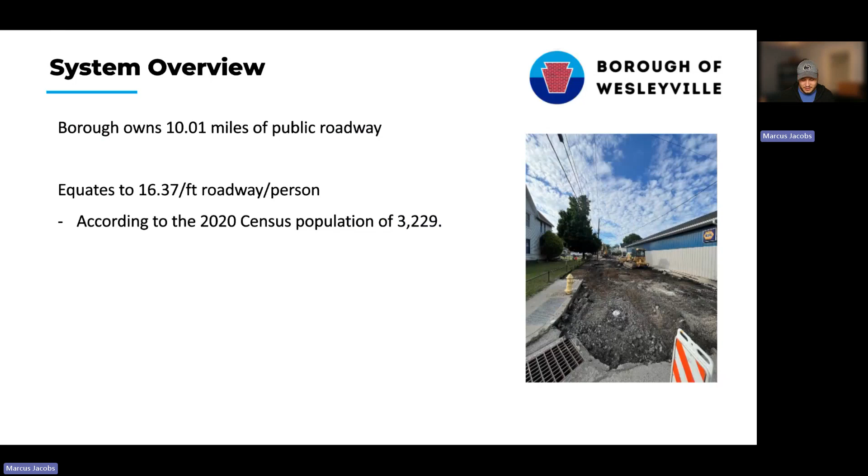So first off, what does it typically look like for a road? What is a typical cycle? For asphalt roadways, PennDOT recommends a 12 to 15 year resurface cycle - every 12 to 15 years, getting it resurfaced, trying to budget for that.

We probably can't do that, so we should aim for more like a 20-year cycle. It's just more affordable, it's more attainable, and it's probably good enough for us given the amount of traffic that we have. I think we can extend our roadways to be 20 years, and it also just makes the math a little bit easier. And it's challenging even to get to a 20-year cycle, as you can see.

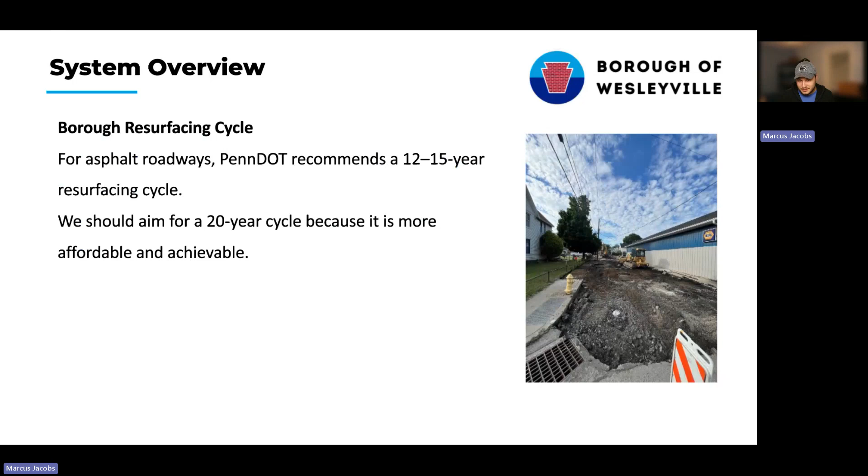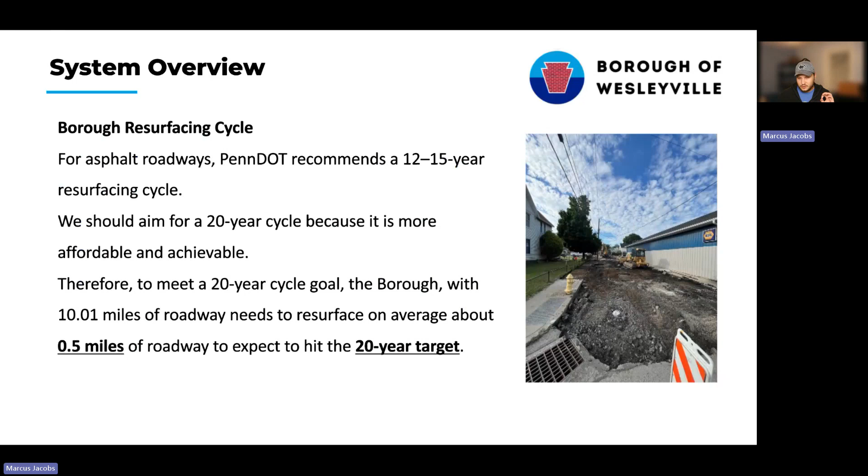So in particular, if we have a 20-year cycle goal in place, the borough with a little over 10 miles of roadway needs to resurface on average about 0.5 miles of roadway every single year to expect to hit that 20-year target. Yet you also need to make your roads last 20 years as well, so it's a challenge all the way around. But 0.5 miles of roadway every year being resurfaced is the goal - if we can get that, then we're on track.

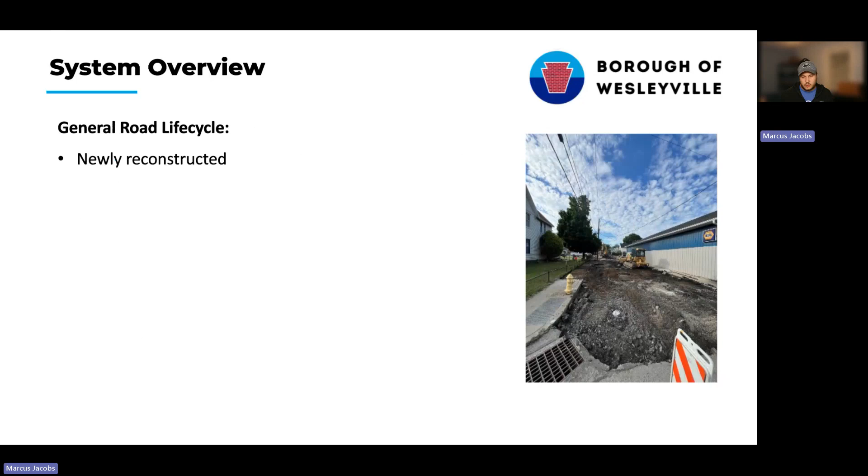In terms of what a general road life cycle looks like, PennDOT has their recommendations - 12, 15, but we'll do 20. For one, it's newly reconstructed, so you've got a good solid roadway with a solid foundation. Then after 5 to 7 years after that road has been laid down, that's when you can start to think about some pavement preservation techniques with different treatments that you would apply, probably every 5 to 7 years after that, and just get into that cycle.

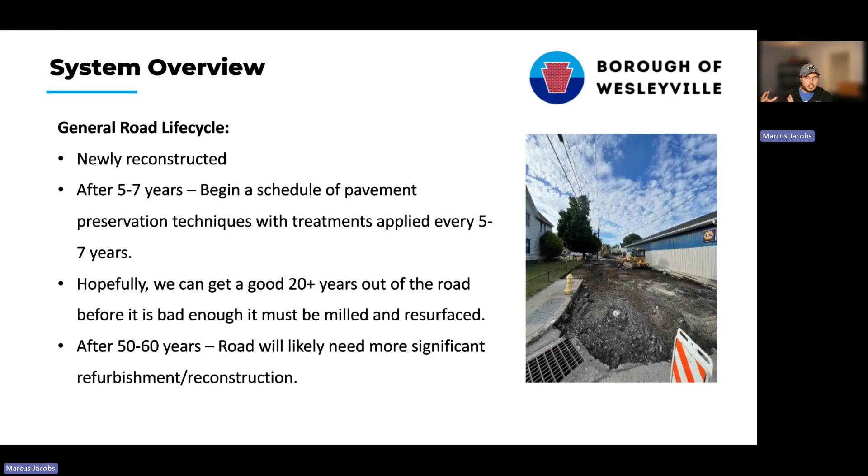Hopefully we can get a good 20 plus years out of a road before it is bad enough that it must be milled and resurfaced - that's really the goal here. After a couple of cycles, if we get 20 years thereabouts with resurfacing repeated 20 years, 20 years, 20 years, then after about 50 to 60 years of that kind of cycle, the road will likely need some sort of more significant refurbishment or reconstruction. So there'll be one kind of big project every 50 to 60 years or so. That's the general life cycle.

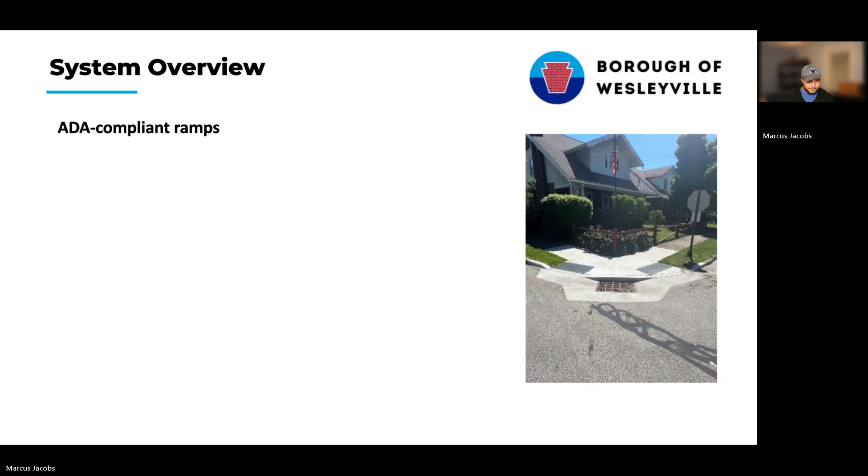We are committed to improving all aspects of our transportation system to ensure that it meets the standards of the ADA guidelines. What's nice about these is that once you put them in, there's relatively very little maintenance on them, and you're going to get 50, 60 years out of them. So it's actually a really nice investment.

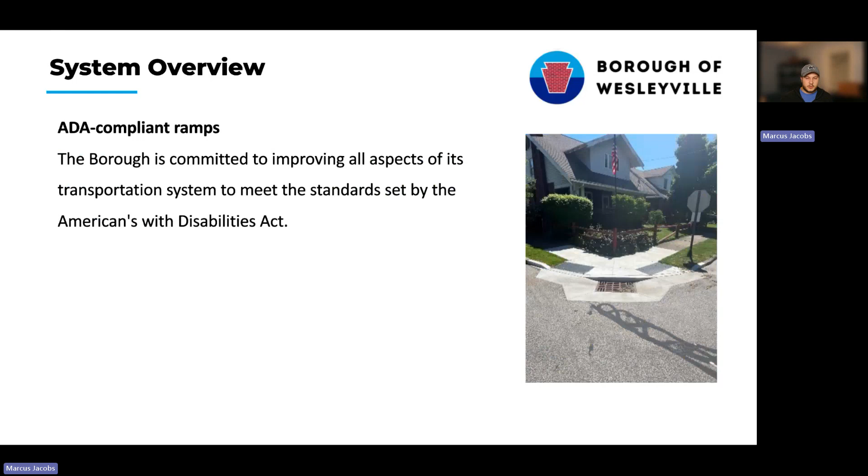And you see a lot of impact. It really looks a lot better, it functions so much better, and it's so much more accessible. So we really need to be thinking about this. Every time a roadway is impacted, meaning when it's resurfaced or reconstructed, the borough includes these investments in the project scope.

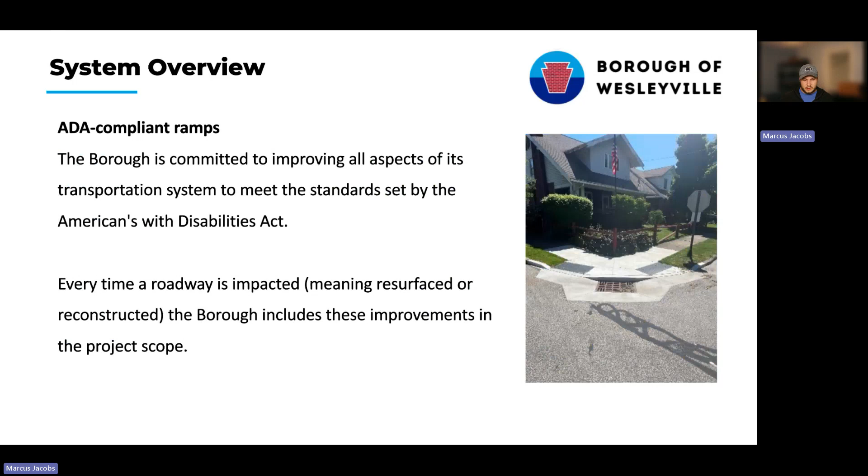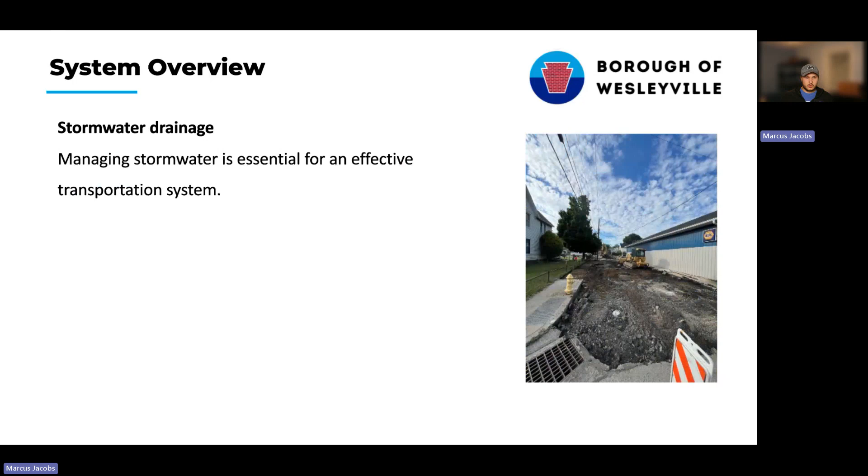Next is stormwater drainage, another thing you need to think about when talking about roads. Managing stormwater is essential for an effective system, and we have an aging stormwater system in place with many components that are falling apart. We have catch basins, which are an important piece of the puzzle, that are just crumbling—old masonry, pretty much 100 years old. We need to make investments in this system to improve it, and it's best completed at the same time as the roads. That's another thing you have to do along with the road, so it really increases the costs.

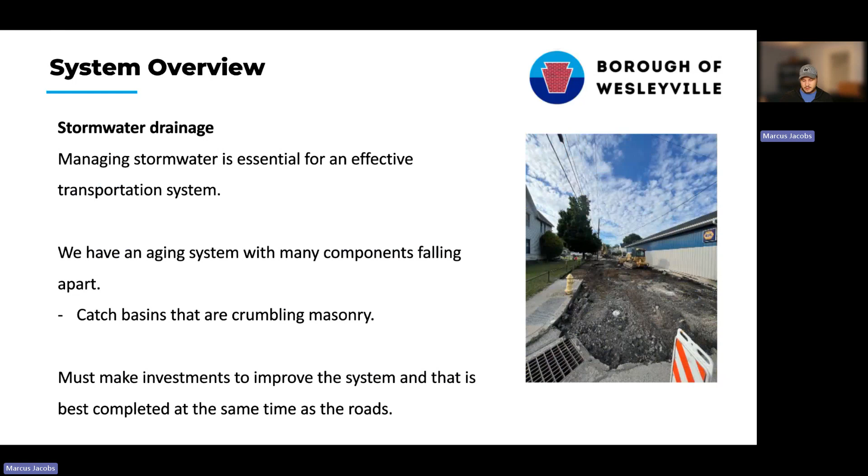And then road signage, something we have a responsibility to do. We have public roadways, and public roadways need signage. We are on the hook to post signage, including stop signs, speed limit signs, street name signs, one ways, parking, crosswalk signs, and more. Currently the signage we have is old and no longer functional to the degree it needs to be. This is often forgotten about when we're budgeting, and the cost quickly stacks up.

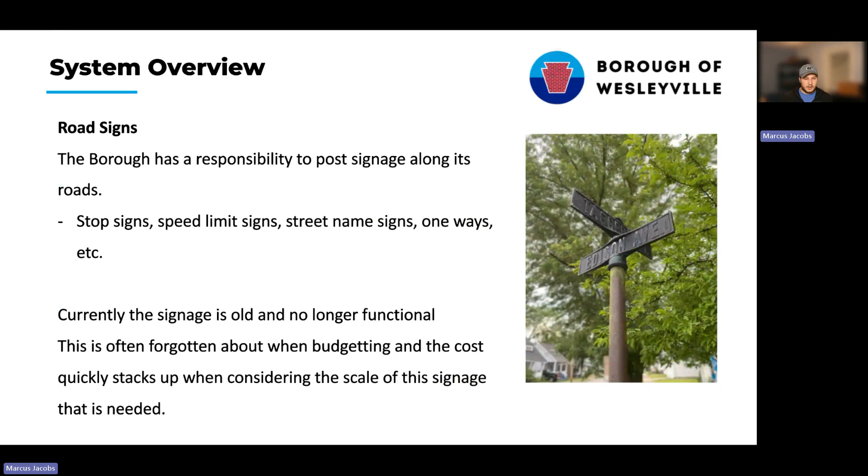You don't just need one or two stop signs, you're going to need 20—and 20 of everything, and the cost immediately skyrockets. So this is often forgotten about, but we need to put a good chunk of investment into this. The current signage is old, dilapidated, and non-reflective. That's really the big piece—you can't just have flat signage anymore. You're supposed to have it be reflective, so it's better with headlights at night.

The signage we have off to the side, the old-fashioned way, is amazing, traditional, very nice aesthetic for the community. However, all of those need to be repainted so they're clear, and really they shouldn't be the primary sign anymore. We should put up the reflective ones so we're up to date with the latest standards. Reflectivity is good, and they need to be a little larger in some degrees—the other ones just have better fonts and all that. There's been a lot of thought that's gone into it over the last 100 years.

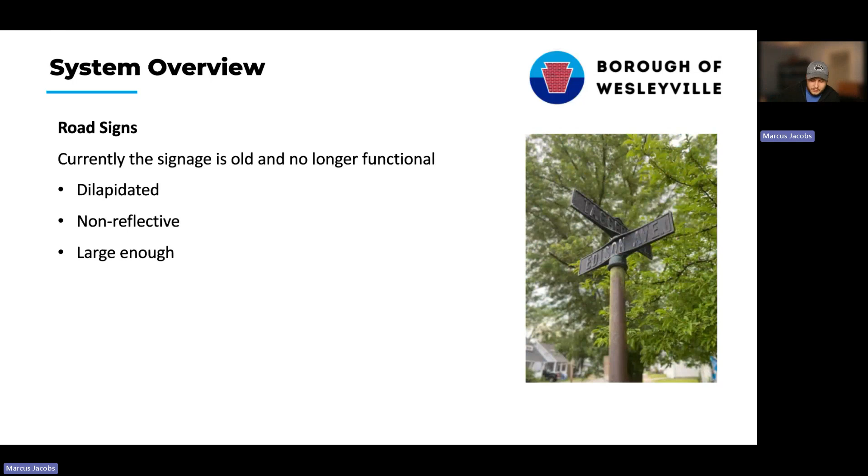But these are amazing, and any ones that have had to be taken down—if people in the community have ideas of how to use this, we've been thinking about how to repurpose those old metal signs, like this cast iron one in the picture here. How can we reuse them as a public arts display or something like that? Or should we put them back up at the intersections alongside the new ones? We'll have to think about that, but let us know. We must plan to improve this, and this is often overlooked.

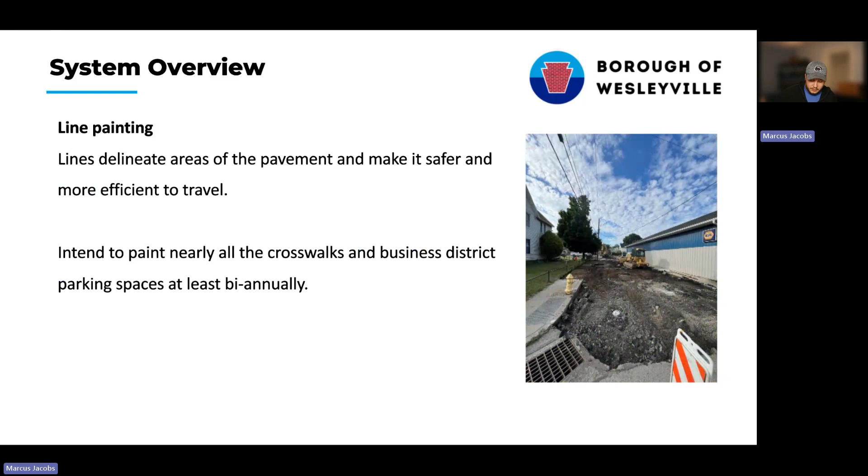Line painting is another thing to consider. Lines delineate areas of the pavement and make it safer and more efficient to travel. We intend to paint all the crosswalks in the business district and the parking spaces at least biannually. This is something we do mostly in-house, completely in-house really, and it can be challenging to undertake for our relatively small public works crew. But they really knock out quite a bit. When you think about it, there's a lot of lines to be painted, so it's definitely a large undertaking.

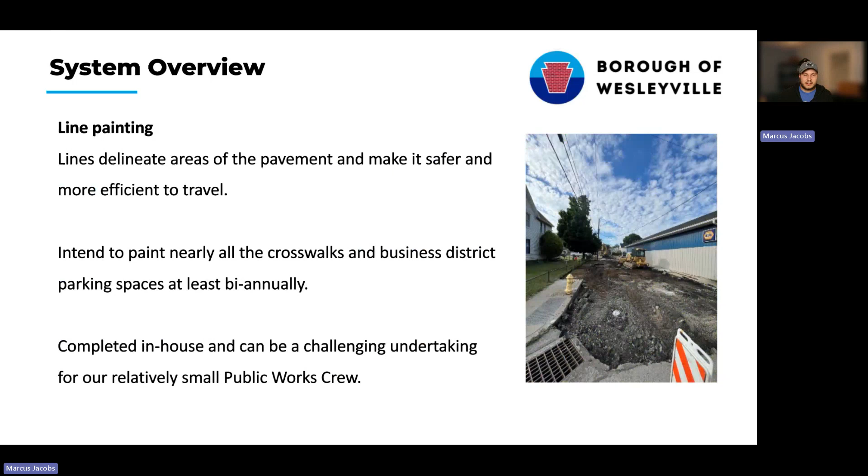And then it's worth noting that as we've gone over the system here, there's a lot to think about. It's very expensive, but transportation infrastructure is a challenge for everybody—it's not just us that's experiencing these challenges.

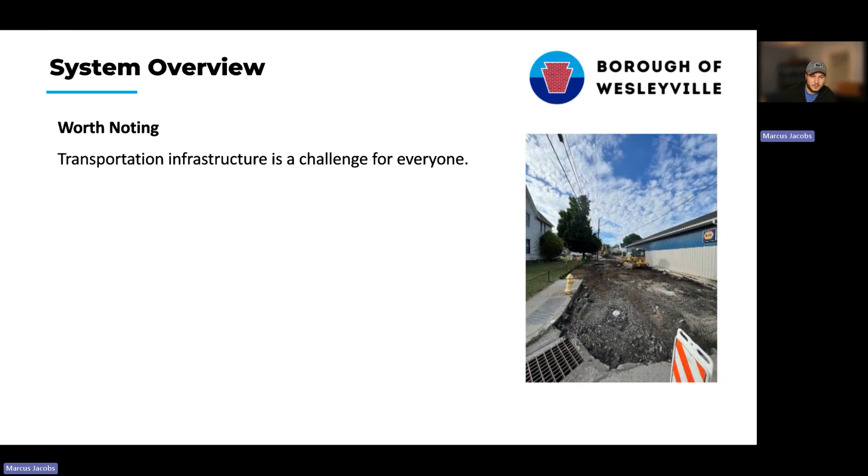There's actually only two PennDOT approved firms in this region capable of working on resurfacing public roads, and that's one of them we're very proud of hosting right here in the borough, having a headquarters right here, McCormick Construction. They are right in our backyard.

Contractors come from all around to the asphalt plant that we have right here in the borough, off of Pearl Avenue. So when we're undertaking a transportation infrastructure improvement program, a lot of that centers around needing to upgrade our roads and asphalt pavement. It's certainly helpful when we've got an asphalt plant in our backyard, or we're in their backyard, and it's super easy for McCormick Construction to get work done in and around this area. We're on their doorstep, so we're very lucky for that.

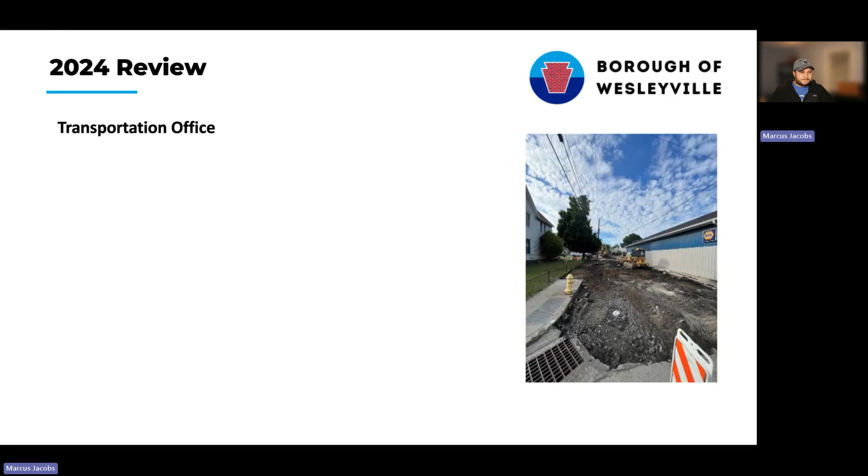Now to look at what we've done this year, we've had a pretty busy year in 2024. Overall, we reconstructed - did a full road reconstruction, dug it completely out. That's the picture you see here on the right, the really dramatic construction photo. Completely dug up the road, had to relay the foundation, and then build the roadway up a total of 12 inches of pavement, a very significant amount of asphalt. That was 2 blocks of Center Street, and that cost $300,000.

That would not have been possible without the help of the county executive contributing $250,000 of gap funds. So we hugely appreciate that. It wouldn't have been possible.

Next, we did a good deal of resurfacing - Eastern, Willow, Gray, and Idlewood - for over half a mile, a total of 0.65 miles. So we are exceeding our target right now of 20 years. And that did set us back a pretty penny, $209,000, $210,000.

And then in terms of preservation, we're still moving forward. We tried for the first time in 2023 seal coating, and we did it again this year, or as a lot of people might know it, tar and chipping. We did this year 1.05 miles so far, and that was $45,000.

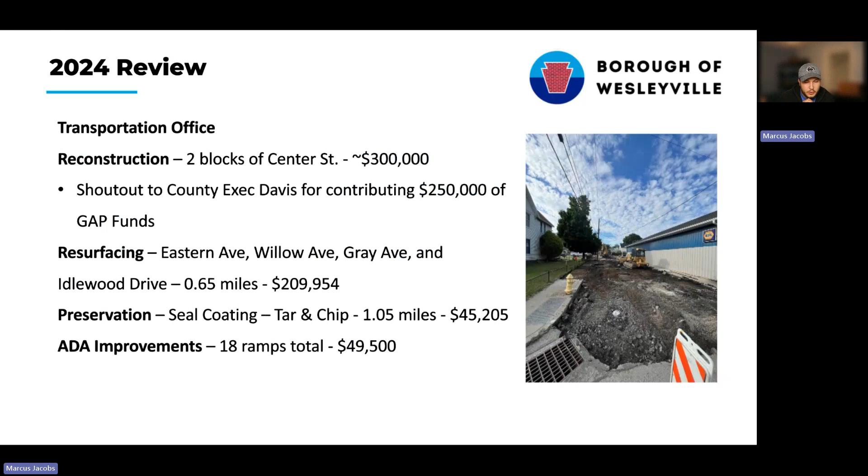And then we also did significant ADA improvements to our borough here, with a total of 18 ramps completed. Well, 18 ramps actually on their own, and then there were some more that were looped into the resurfacing projects. But overall, we spent $49,500 dedicated to ADA improvements.

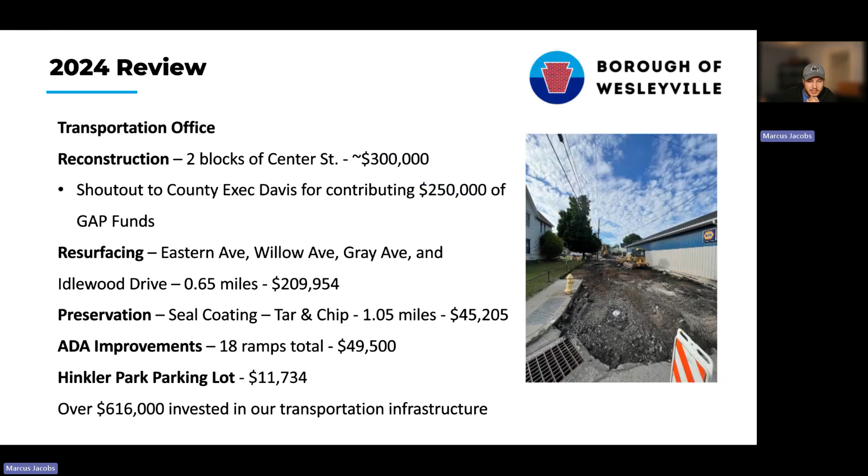And then also we put a parking lot in Hinkler Park - at least that was the millings that we laid down and got rolled out and everything. So that's a huge improvement for the park down there. And in total, we invested $616,000 into our transportation infrastructure. So it's been a significant year this year.

Now, one thing to address is our concrete streets. We got a fair deal of them. We own quite a few streets that either have a concrete surface or have a concrete base that has been overlaid with asphalt. In terms of the overlay, you can often notice that by the reflective cracks that peer through the asphalt. The concrete has cracks in it, it has joints, and those joints you can't just cover with asphalt - they will shine through or reflect through the asphalt over time. So you really have to deal with it. A concrete base with an overlaid asphalt is not a very effective road, so we've got to do something about our concrete surfaces and our concrete base.

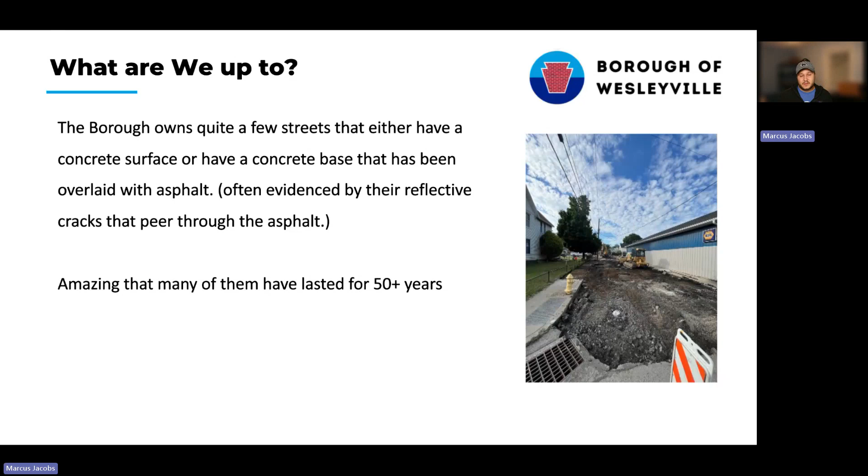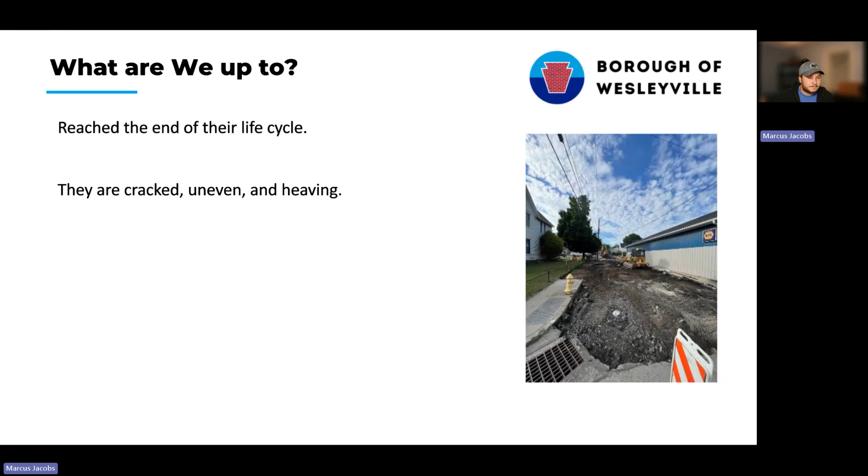Now it is amazing for many of them how long they have lasted, over 50 years for the most part. But by this point they have reached the end of their life cycle - that's just the reality of it. They are cracked, they are uneven, they don't have the best foundation, so for the most part a lot of them are heaving back and forth. They're relatively difficult to repair, and the repair options are limited.

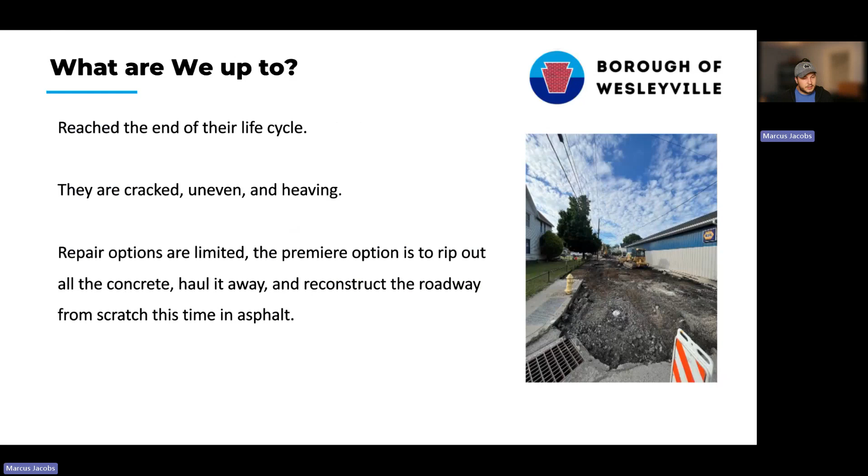Really the premier option that we have is to rip out all the concrete, haul it away, and reconstruct the roadway from scratch, this time with asphalt. As I said, we got the asphalt plant right there, so we might as well rip this out and lay down some asphalt. But it is going to cost quite a bit - it is not easy to rip up and haul away that much concrete, and laying down that much asphalt, just the pure quantity you have to put down, it's just expensive.

If we are fully reconstructing a roadway, we really need to be completing other projects in tandem. So if we're doing the roadway, we might as well do the sewer line underneath, or it also needs to be done with stormwater drainage improvements, curbing in certain areas, or ADA ramps. All these things, when we're doing a project, you kind of have to look at as well.

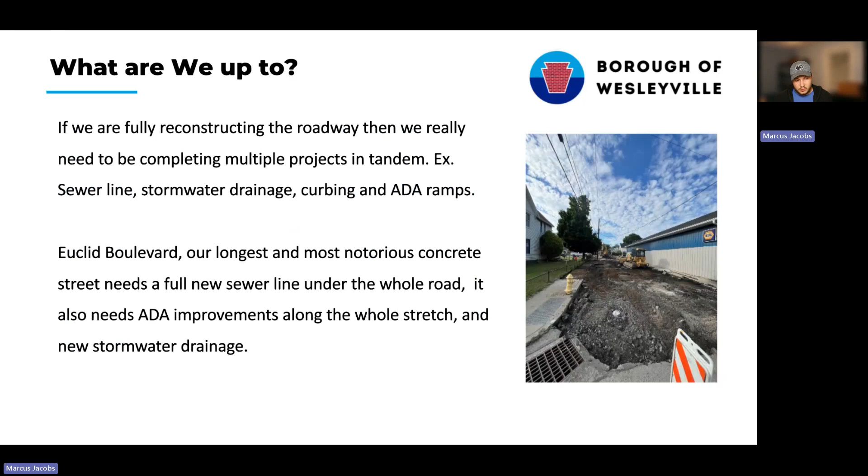Euclid Boulevard, as many of you know, is one of our longest and most notorious concrete streets, and it needs a full sewer line under the whole road. It also needs ADA improvements along the whole stretch, and it needs stormwater drainage. It's a long and wide concrete road, so imagine the massive amount of concrete that needs to be moved and hauled away, and then the massive amount of asphalt that needs to be laid down to recreate that road. On top of that, the sewer line underneath, the ADA improvements, the curbs, the stormwater - there's so much to think about there.

The estimated project cost for Euclid is $2 million, and every single year that goes up a little bit more. $2 million is something the borough cannot do itself, doesn't matter how much we save. We would have to save for a decade before we'd be able to reach that target - maybe a decade to 15 years - or we'd have to go significantly in debt. And if we did save for a decade, we couldn't do anything else; everything else would crumble just so we can do this one road. It's just so out of the ballpark, these numbers.

So we definitely need to figure something out here. There are grants that can do this, but it's not super easy to get grants. You have to put together a good plan and detail it. If someone has experience with that, certainly step forward - we could use the help.

But anyway, that's just an example - $2 million, that's a big one. We have a fair deal of concrete streets, and each of them... this is one of the biggest and longest, so it's going to be the most expensive likely. But there's a good deal of other ones, and it all adds up.

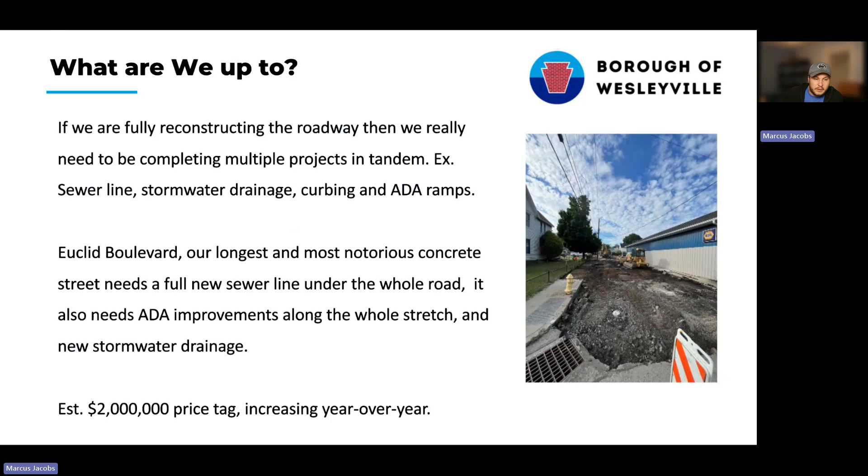Now, in terms of pavement preservation techniques - in general, because pavement is so expensive to replace and repair, we need to make sure we preserve it as best as we can when it's in good condition.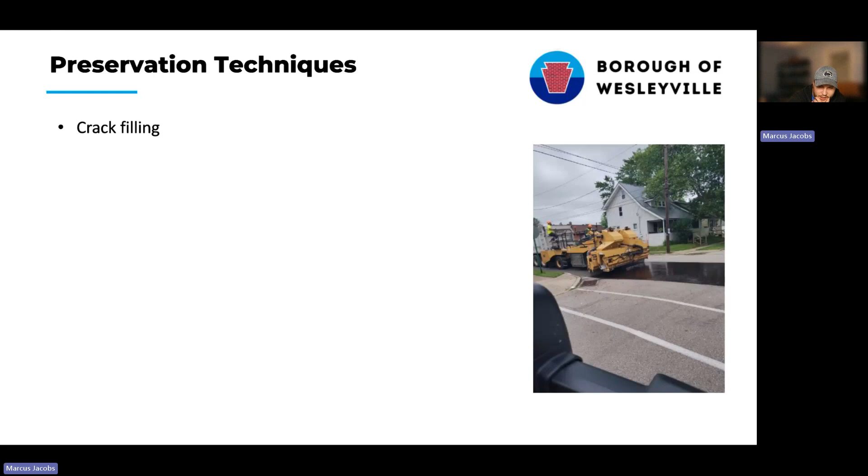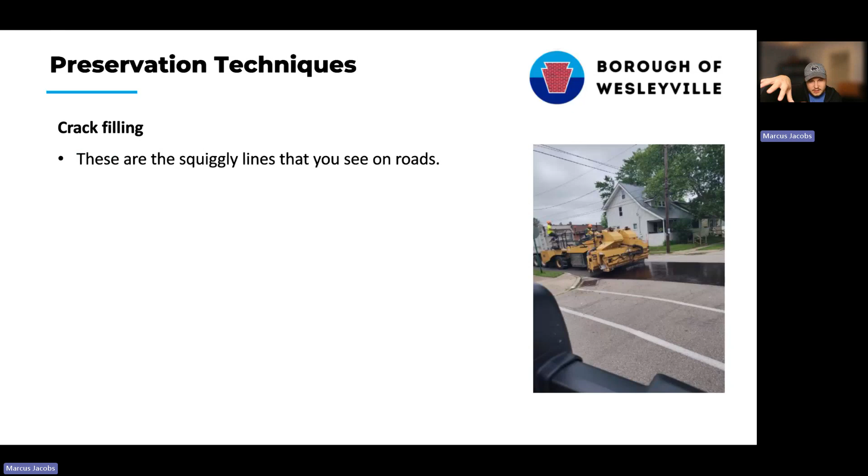For one thing, crack filling is an example. I realize now I shouldn't have put this picture here because that's not crack filling. Crack filling is those squiggly lines you see on the roads - those black tar lines that go all over the place. They're kind of ugly, but they serve an important role: applying a line of oil to a crack fills it in, and that prevents water from seeping deeper into the crack, which would then freeze and weaken the pavement even further.

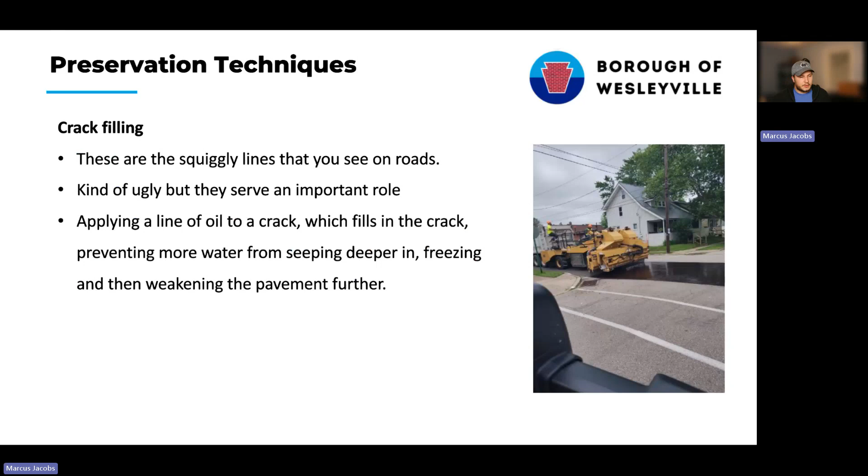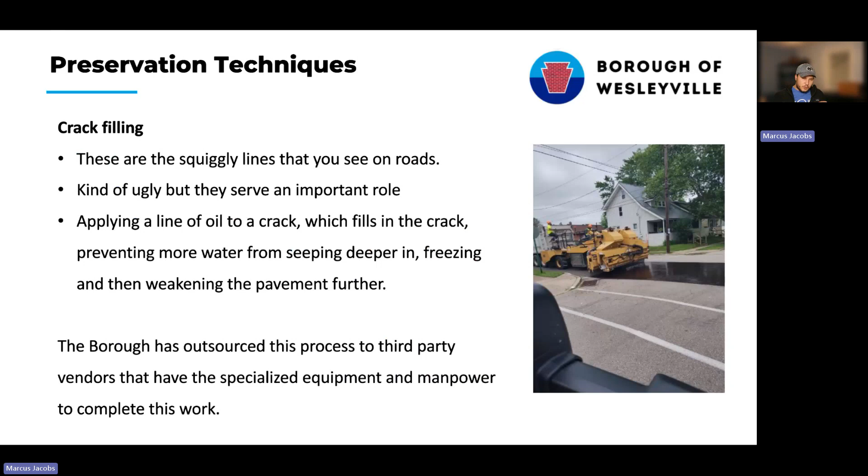The borough has outsourced this process to a third-party vendor that has the specialized equipment and manpower to complete this work. Realistically, you'd need a specialized piece of equipment and to buy the materials yourself, so it's cheaper if we do it on a per-gallon basis for crack filling. We try to do this as much as we can - you get a decent return on your investment, especially for those thicker cracks. Filling this in is really important.

Next up is pothole filling, completed in-house by our public works crew. The potholes in the road surface are swept out, and cold patch asphalt is put in the hole, which helps prevent more water from getting in and the pothole from growing even larger or continuing to crumble around. Pothole patching is a quick fix which buys us time until the next resurfacing - hopefully we can fill in these potholes, keep the road surface comfortable, prevent it from growing any further, and buy us time until we're ready to do a more significant resurfacing.

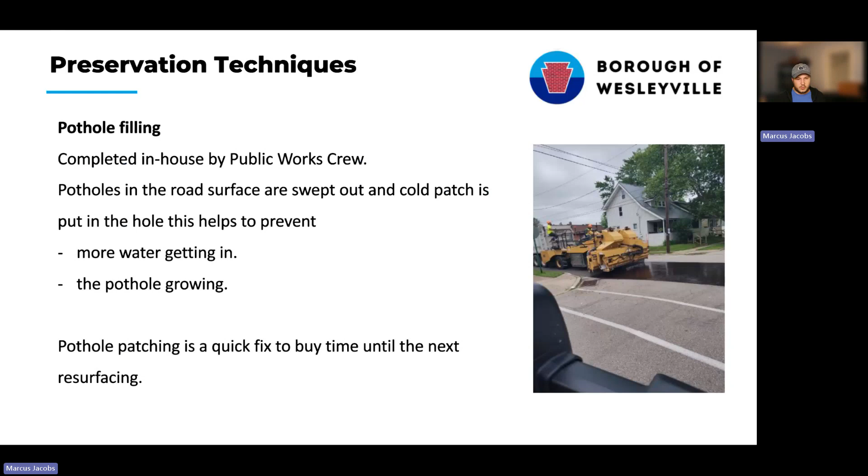Now, if significant potholes are forming somewhere - sometimes you'll see a whole section that's just got significant potholes - that might be a sign of a larger problem, such as some underlying foundation that needs more significant base repair. It's a sign of a bigger problem, and it's not easily fixed with just simple pothole filling. So you might see and be annoyed by the rough ride over a certain section, but there's only so much you can do to fill potholes with cold patch.

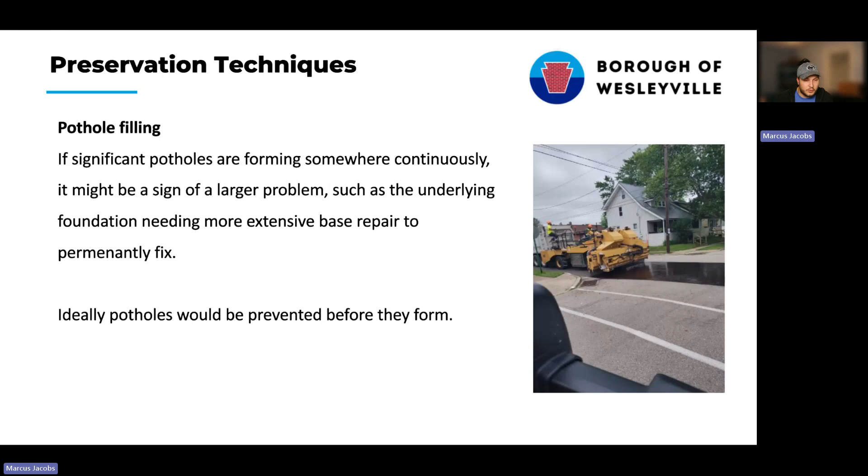Some of it, when you have a problem in the foundation underneath, it's going to be what it's going to be in that section, unfortunately, until you can do the more extensive repair. Now ideally, with potholes, they would be prevented before they form. So one way that could be done, to seal the surface before a pothole forms, is seal coating.

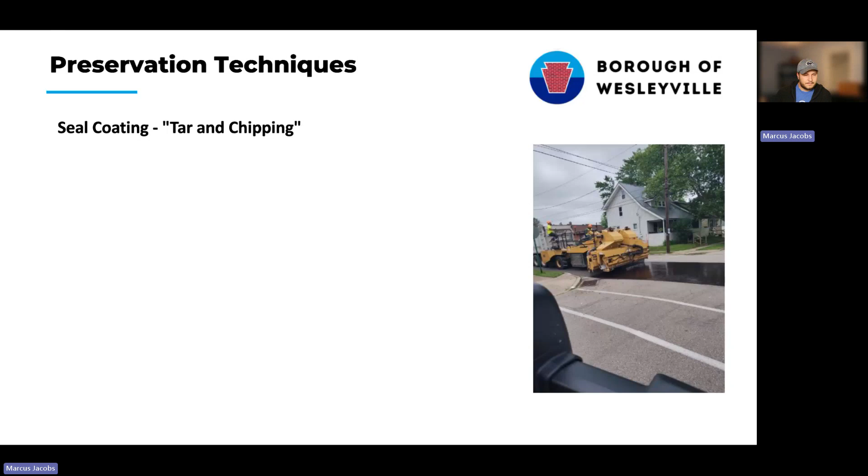The way seal coating works, or more commonly known as tar and chipping - you've likely heard it called that - this process begins with spraying an oil-based mix on the existing asphalt surface, which saturates the surface and seeps into the cracks, sealing it uniformly.

So that's what we're seeing over here on the right. That machine is spraying what we'd refer to as tar or oil onto the surface. As that hits the surface, it saturates and seals it, separating the air from the surface as it was before. Then immediately after, this machine - it may be hard to see here - follows up with a layer of aggregate rock, or as we may know them, chips, which will then set into the oil and create a new roadway surface that protects the oil layer.

That makes sure that sealant, which is very tacky, stays down, and the chips will then kind of settle into the surface.

Then after about a month, once the surface has been driven on and settled in, the borough uses a street sweeper to collect the excess rocks. We try not to use the street sweeper when it's too dry, because it gets very dusty in that circumstance.

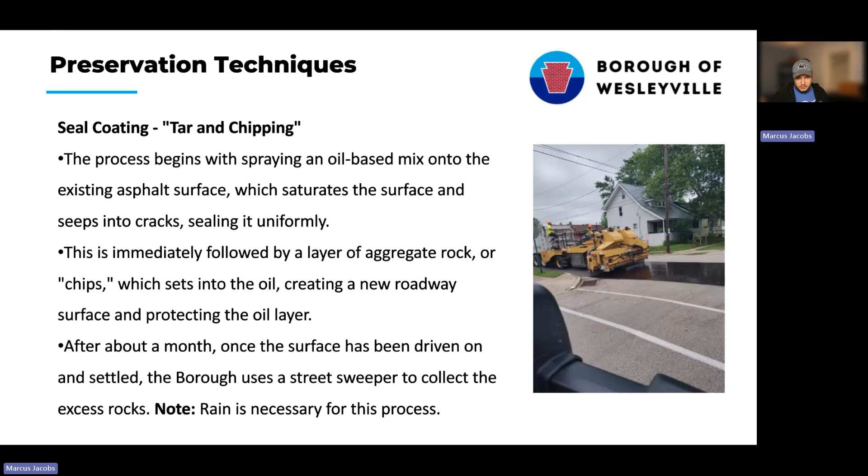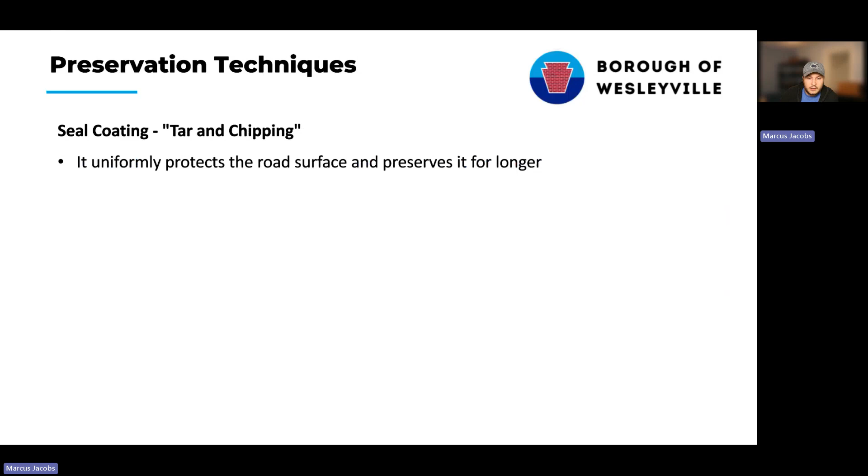Also, the great thing about seal coating is that it uniformly protects the road surface and preserves it for longer. That means the good asphalt roads we do have will last longer before crumbling, and more costly repairs can therefore be delayed, and the finite resources we have can be focused on other priority areas.

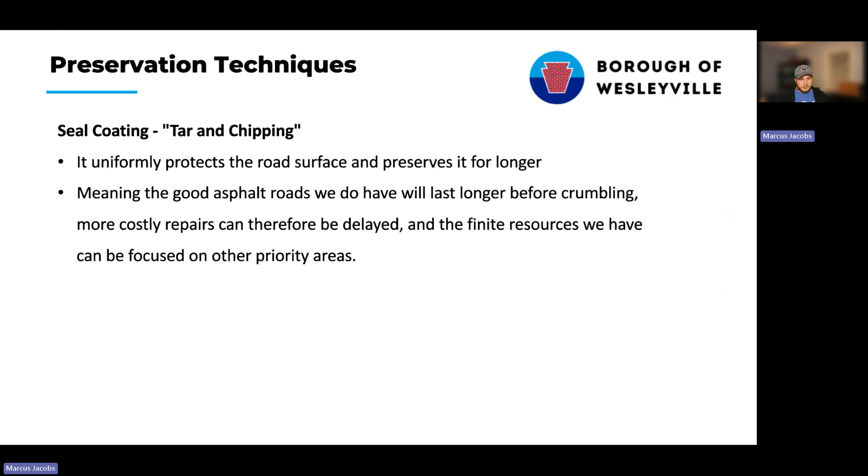Seal coating is relatively inexpensive - about 8 to 10 times cheaper than a resurfacing, and a resurfacing would be like a mill and repave. So it's about 8 to 10 times cheaper than that, and a multitude cheaper than a reconstruction like we saw on Center Street. So much, much cheaper.

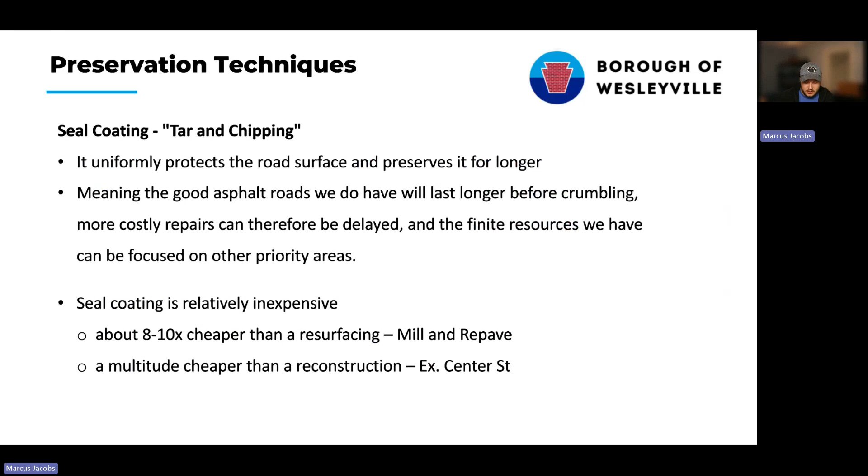We are also part of a joint bid packet that includes nearly 20 other municipalities. This joint effort increases our quantities, so we're buying in bulk, which provides us with relatively good prices. It also shows we're not alone in this - there are 20 other municipalities in this region also tar and chipping their roads, because they also see the value in this. So we really ought to be doing it.

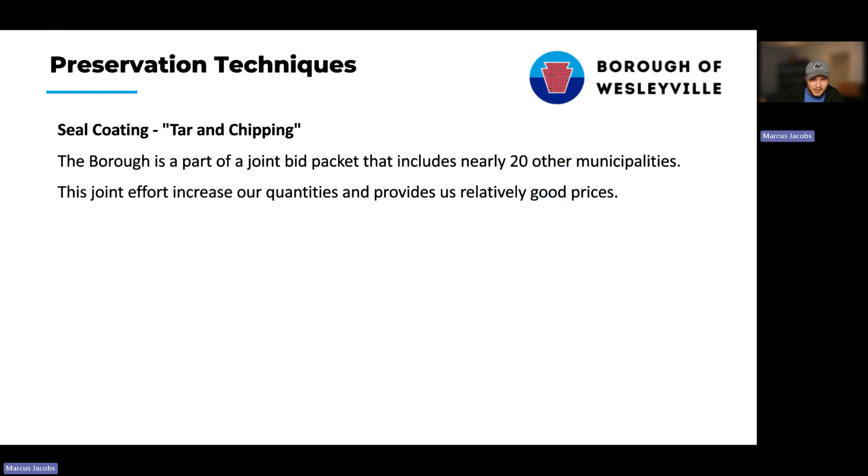In the 2023 season, which was the first time we really did this, we did a total of a little over 2 miles, and we did College Heights, from 27th Street to 32nd, and that was interesting - a lot of people, since it was the very first time it had been done, were kind of confused. Then again we did it this year in 2024, and that was just over 1 mile so far, on a couple roads: Union, Woodlawn, and Willow.

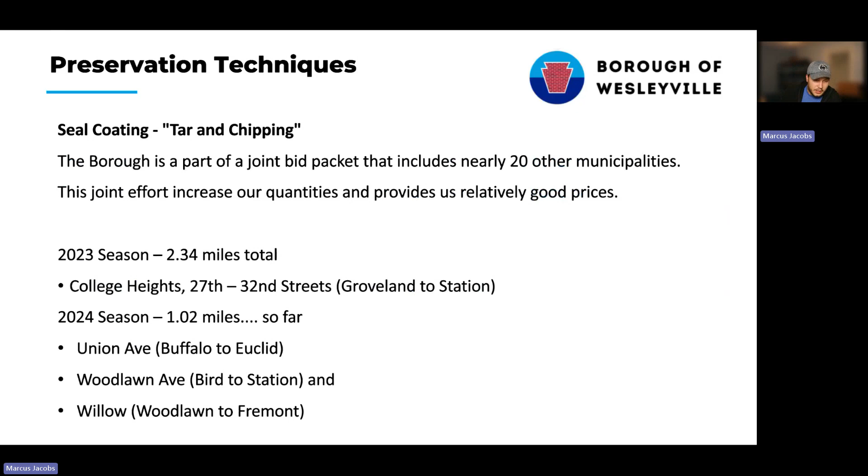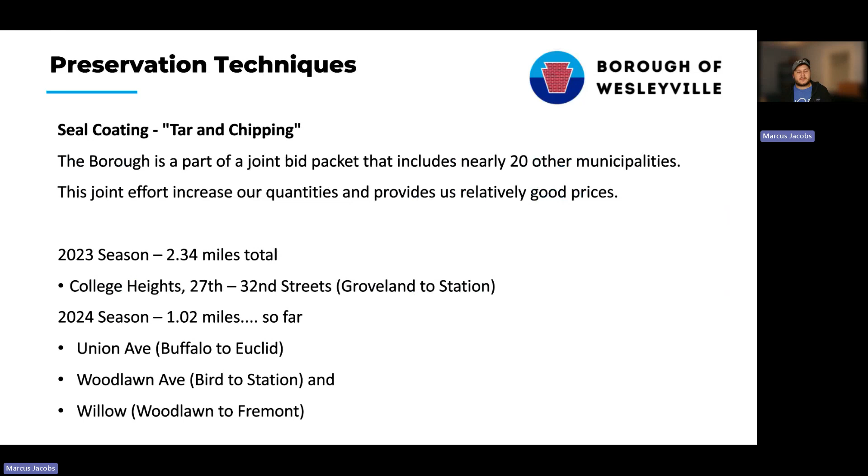Again people were confused, and it was the first time we've seen that, especially in town, where you see sidewalks and more stormwater drains and stuff like that. So it was something different we're trying, and it only works in certain circumstances.

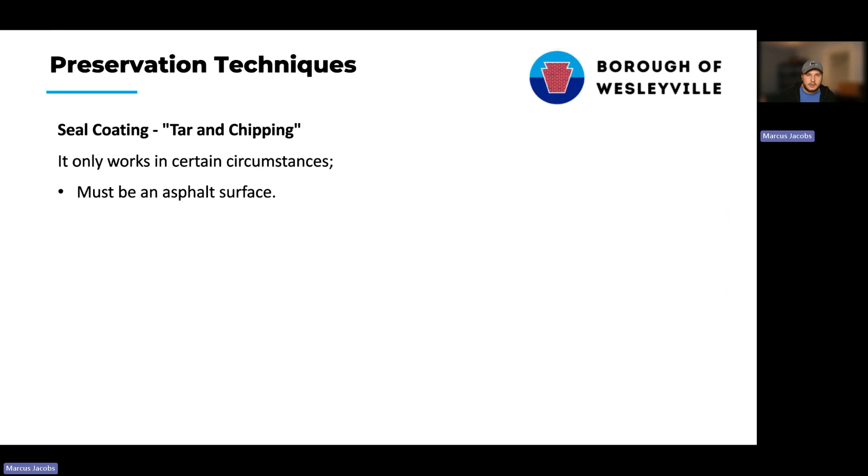If we see the value in seal coating and want to try it on some of our roads, what are the requirements to be able to seal coat? For one, it must be an asphalt surface, so immediately all the concrete roads we have are excluded from this entirely. It doesn't do anything - if you spray it onto concrete, it doesn't fix the underlying problem with the concrete at all.

It also must be relatively flat on the surface. You don't really want too much bumpiness, or tire track divots or things like that. Seal coating is really just spraying the surface and putting a little bit of chips on it. You're not fixing much, you're just preserving the surface that's there.

And it must not be too new. You don't want to preserve a surface that's in very good shape already. So you're like, well, I can live with not preserving this for a couple years, and I can preserve other roads that are higher priority right now, maybe.

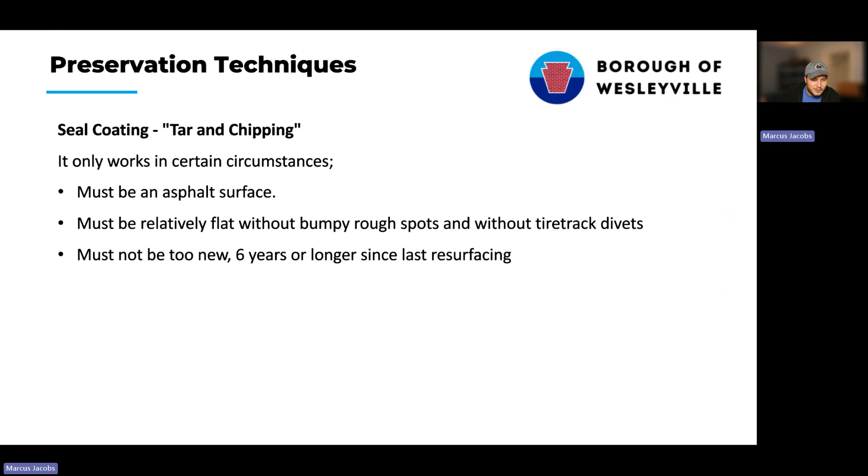And you also must not do it if it's beyond saving. If it's so bad, it's so not flat, it's everywhere messed up and bumpy, then you're not going to fix the road by seal coating it. Especially if you anticipate resurfacing it within the next 5 years, you'll be spraying seal coat on this and then ripping it up.

So it doesn't make much sense. Spend money better, don't spend it on roads that are too bad. That is sometimes counterproductive, because people will see us doing work on roads and say, 'Wait, why are you doing a road that was in relatively good shape when we have a road over here that's in bad shape?' And that's completely reasonable. But in this case, we're really saying, well, that road is in such bad shape, we give you that, the road is so bad that this doesn't make sense to do on it anymore, and we're just going to have to budget for this over the coming couple years for some roadway.

If it's so bad, it just needs to be resurfaced. We just have to budget for that in the next couple years. There's other roads that are in better shape that we can seal coat and preserve them for longer. So as I said, seal coating does not repair, it preserves. It's not some silver bullet, it's not something you can spray on a bad road and suddenly it's a good road. It's just to preserve.

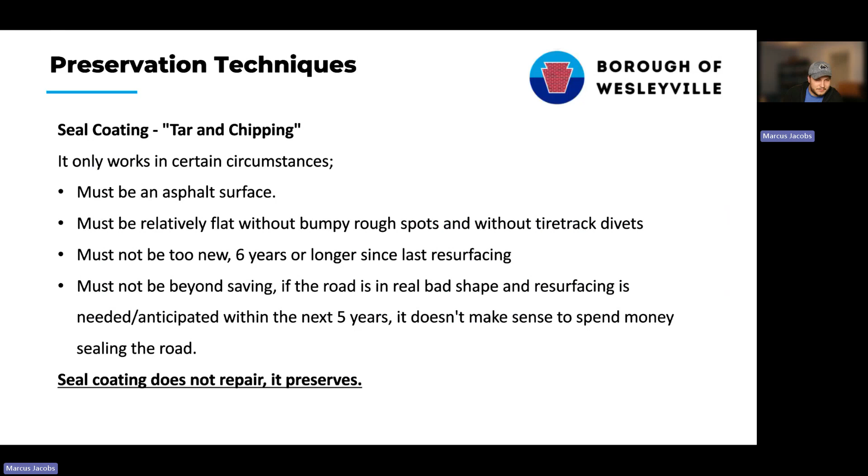Now there are cons after 2 years of having done this, and the public's reaction to it. These are generally what we've experienced, what we've seen.

It's new to the borough. It's not something people are used to, so it definitely took people off guard. Hey, what is going on here? It's also something that's maybe traditionally perceived or more often seen in a rural community. So a lot of people were kind of like, 'Whoa, what? We live in town here, so why are we getting this preservation treatment that you see out in the rural areas, in the backcountry roads, where dirt roads are sometimes seal coated.'

And just to clarify that, there are a lot of municipalities that over time have taken dirt roads or gravel roads and seal coated them, kind of done that as a way of cheaply getting something that resembles an asphalt road. Realistically, that just shows the versatility of seal coating. But in our case, obviously we're doing it differently. We're not doing mud and putting seal coat on top of it. We're taking an asphalt surface and putting seal coat on top. So it's a different angle that we're coming out at it, but we're using a similar technique.

So yeah, rural communities certainly do tar and chipping, but we certainly have our own reasons why we'd be interested in doing it as well. And it's not like we couldn't. It still works here.

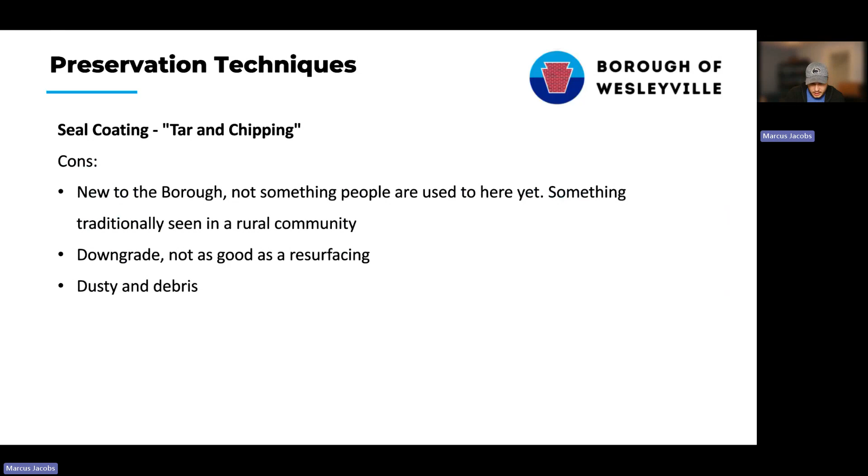In that short term period, when you have a lot of that chip material that has yet to settle, you're going to get a rough riding surface, so it's rougher than you would have on a nice, smooth, blacktop asphalt. People might perceive it as a negative thing.

There's also frustration as to why certain roads are chosen rather than other roads. Some people would say, hey, why do you seal coat this road when this road over here is so bad and needed more investment, needed prioritized? So there's confusion as to what this process is and the value of this process in the whole system.

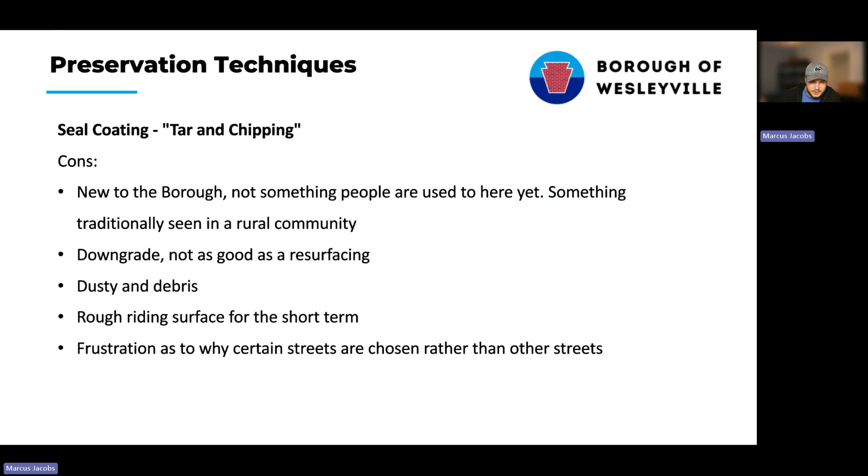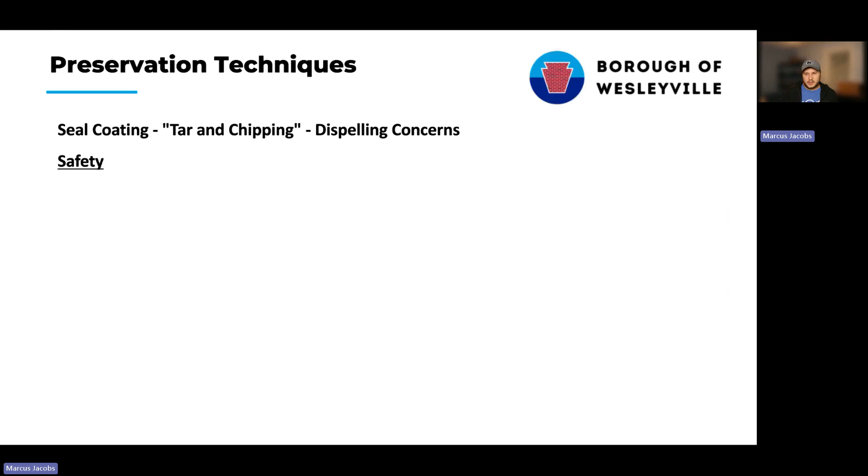One additional concern I really wanted to dispel was safety. People have expressed, you're adding chips to the road, is it becoming more dangerous for motorcyclists or people driving? Is it harder to brake? All those things. Overall, this is a PennDOT approved and recommended preservation tool.

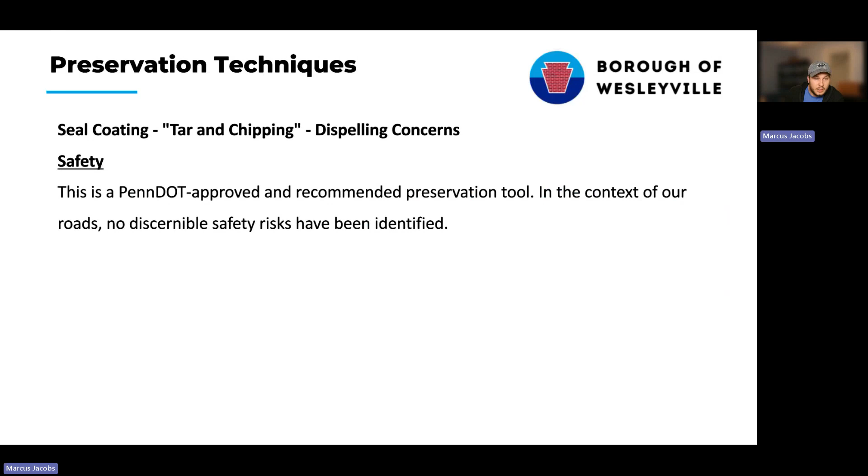In the context of our roads, no discernible safety risks have been identified. Motorcyclists and motorists alike must exercise caution, especially in the initial days and weeks after application. During this time, signs are posted notifying travelers of tar and chips, and it is identifiable when you're driving on the roads that it has been tar and chipped.

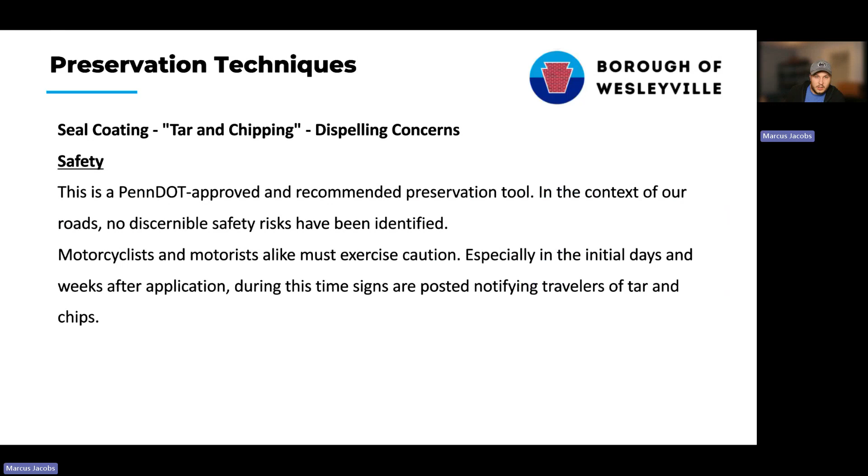When driving within the prescribed speed limits and carefully approaching intersections, the impact of the chips on the roadway surface is negligible to the safe and functional operation of the road.

What is smoother overall, a smooth road from tar and chipping, or a bumpy pothole ridden road? Overall, the adding of tar and chips is negligible in impacting the safety and the functionality of the road. It is not seen as unsafe at 25 miles an hour, and with intersections where you're often coming to a stop and then turning slowly, these tar and chips should not be a cause of any accidents.

And again, as I said, what is better? Is it better to have a smooth road that does have tar and chips on it, or a road that's very bumpy and pothole ridden, especially for motorcyclists, getting bumped around all over the place? So what do you choose?

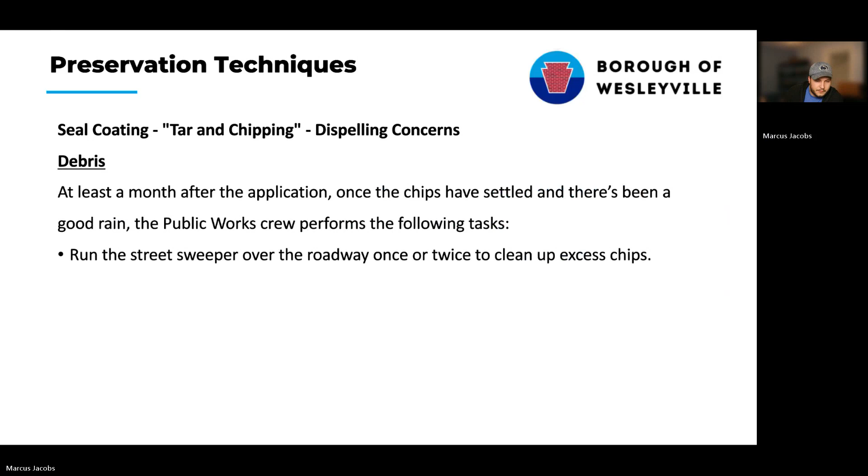Another thing is the debris. People are concerned about that, and about a month after application, that's when we try to go out there with the street sweeper, and it has to be after a good rain. We run the street sweeper once or twice to clean up the excess chips, and then we also use the hose on the street sweeper to vacuum out the catch basins, as well as any chips that worked their way into the catch basins from the tar and chipping application.

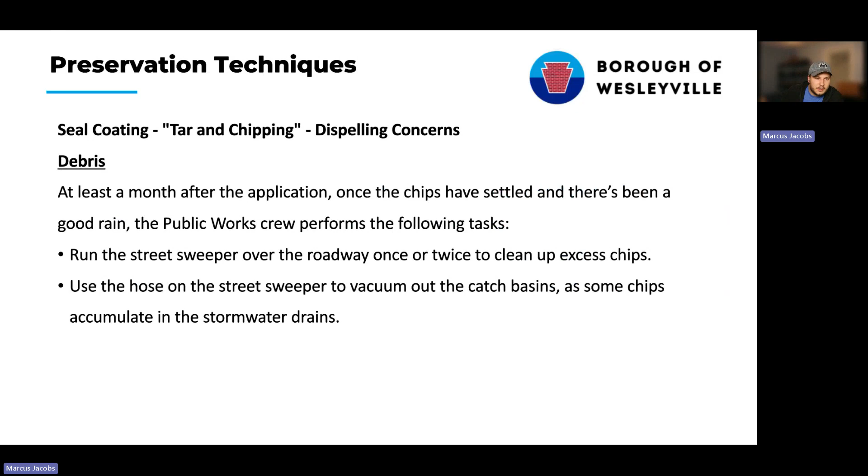And then also another thing is public knowledge. Just in general, people are concerned about this for many reasons, and they don't fully understand this. Many people probably don't get the opportunity to watch this presentation, so they wouldn't necessarily understand what's going on, and they'll have questions, and they'll be misunderstood in some ways about what's going on their road.

So that's where, if you've listened this far and you now have a better understanding of the thinking behind seal coating and the whole technique, please share this with your friends and your neighbors in the community, and help to clarify the transportation decisions that are being made. Because there's a lot of thought that goes into this, and it's not super easy, so certainly share with your neighbors the information.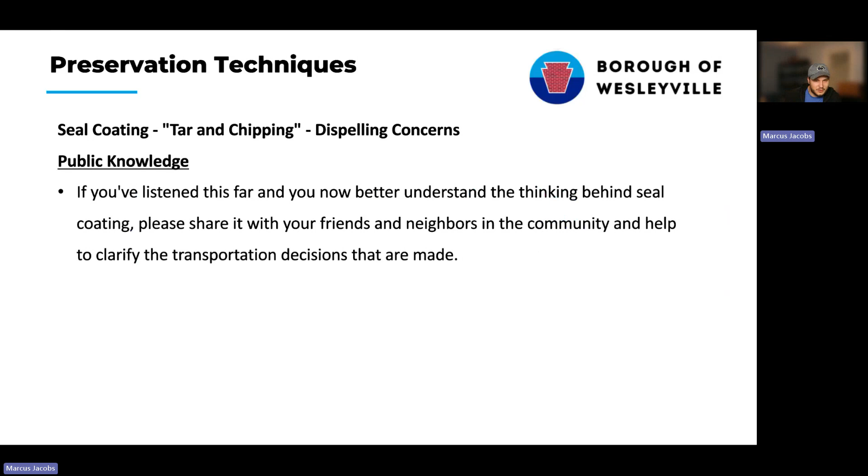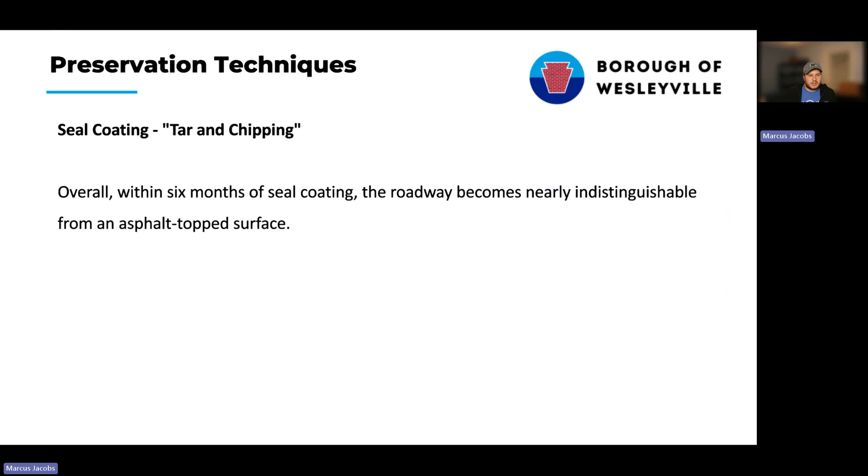And now overall, within 6 months of seal coating, the roadway becomes nearly indistinguishable from an asphalt topped surface. People really can't tell after about 6 months that they're driving on a road that isn't just another asphalt topped surface. Preserving our roads is essential to saving resources, and it allows us to focus more on repairing severely deteriorated roads, such as our concrete streets.

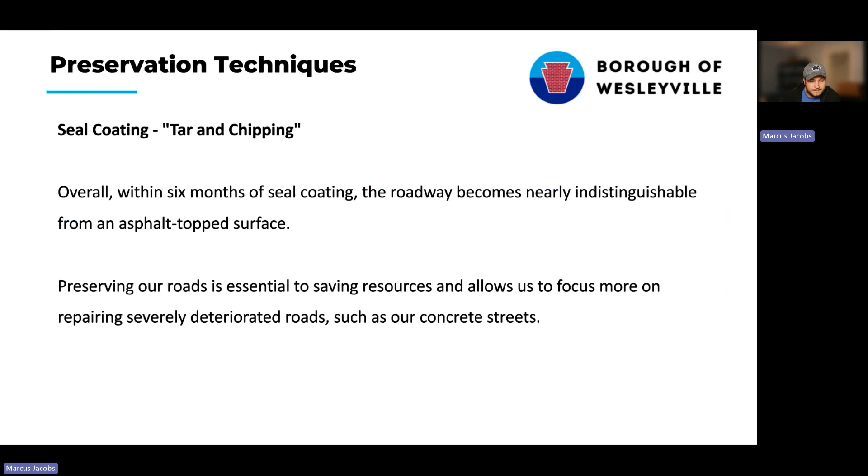So, what is our plan for the road ahead? Now that we've talked about what we've done this year, our system in general, and some of the techniques we could use, what are we looking to do next in the immediate future?

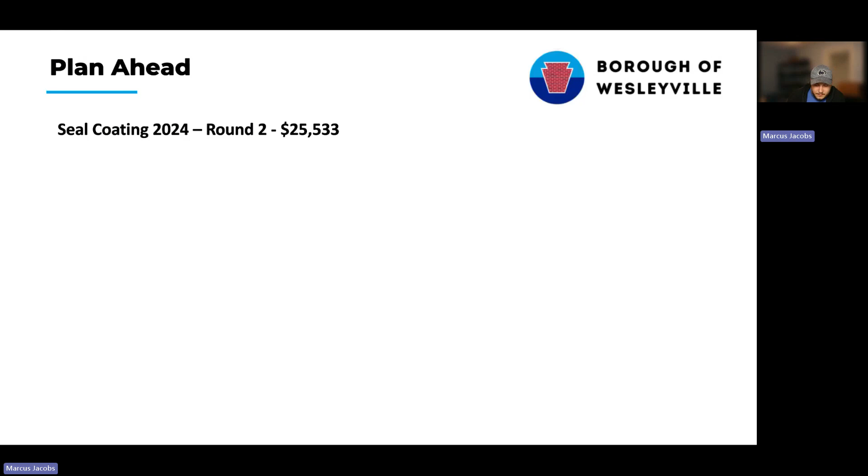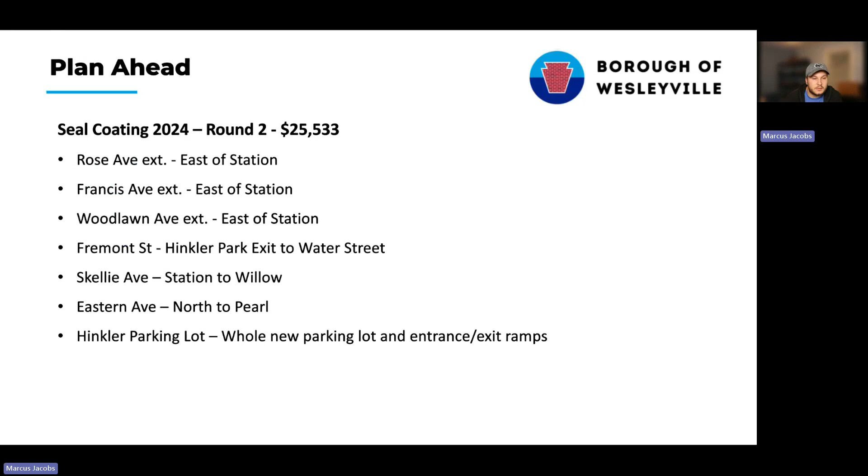First, I think we need to do a second round of seal coating, and this is going to come at a cost of about $25,500. But that includes a whole bunch: several extensions east of Station Roads, Rose, Francis, Woodlawn, also a section about a block and a half of Fremont, a block or two of Skellie, a block of Eastern, and the whole parking lot of Hinkler to really make sure that gets locked in. So there's a lot of surface here that we're getting seal coated for that price.

This gives us an additional 0.72 miles of surface that has been or will be seal coated, bringing the total for 2024 up to 1.74 miles of roadway, which means over the last 2 years, 40% of our roadway system has been seal coated. So over the last 2 years, we've been able to undertake this seal coating preservation technique.

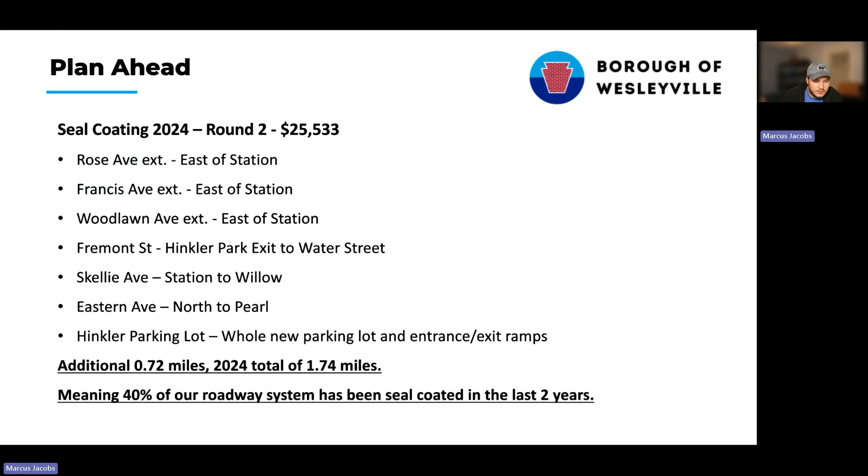Having done this on 40% of our roadway system, we can rest assured for the next 5 to 7 years that we've got 40% of our roadway taken care of, and we can focus on the rest of it. So that's really big, and that's what makes this valuable.

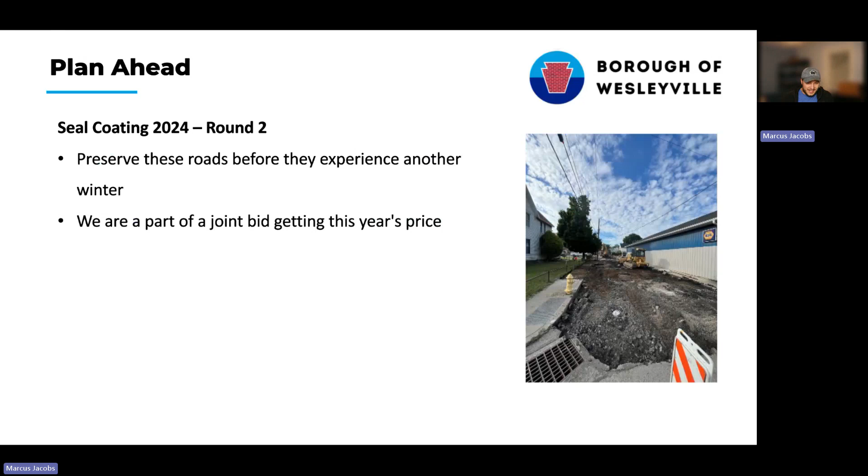And the reason we're thinking to do this, and why we're doing it kind of late in the season, is because we can. We want to preserve these roads before they experience another winter. We're also part of a joint bid, as I mentioned earlier, and we're getting this year's price. So why not take advantage of this year's price when the unit price we enjoy now will likely increase in next year's bid?

So we might as well get the price that we have this year and do it right now. And these roads, if we intend to ever seal coat these borough-owned roads, now is as cheap and as effective as it ever will be again. So we really got to think about it in that way.

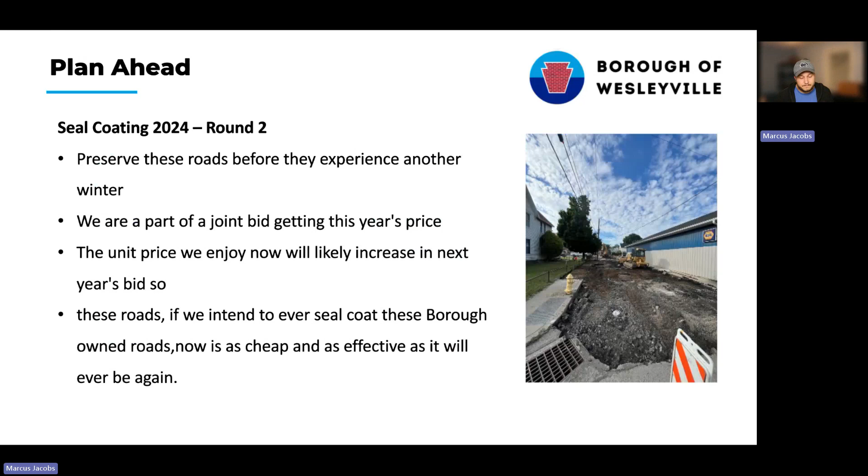So in conclusion, the borough aims to improve the community's transportation system. With limited resources, we must focus on maximizing every dollar and adopting new methods to boost efficiency and functionality.

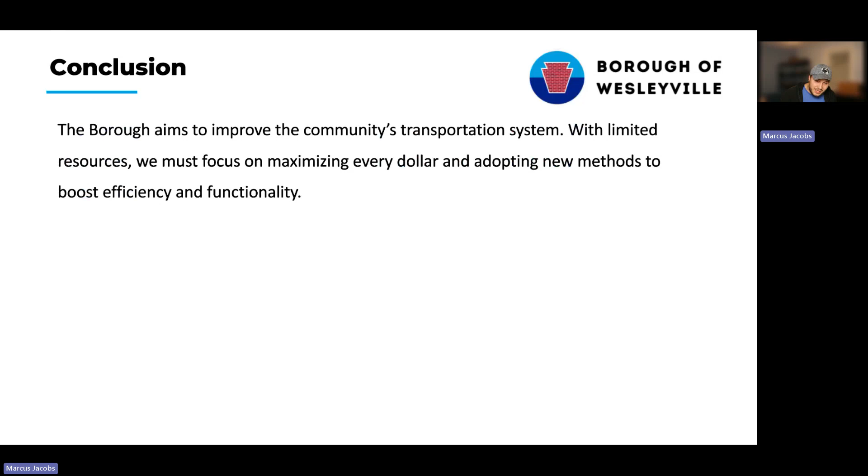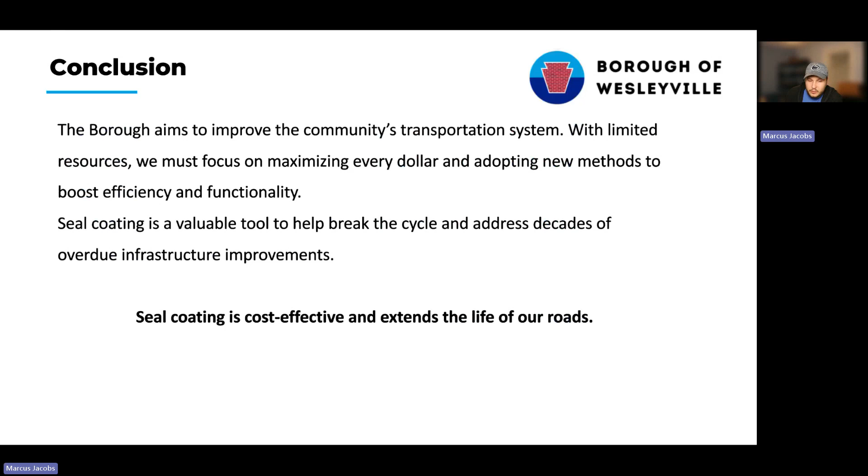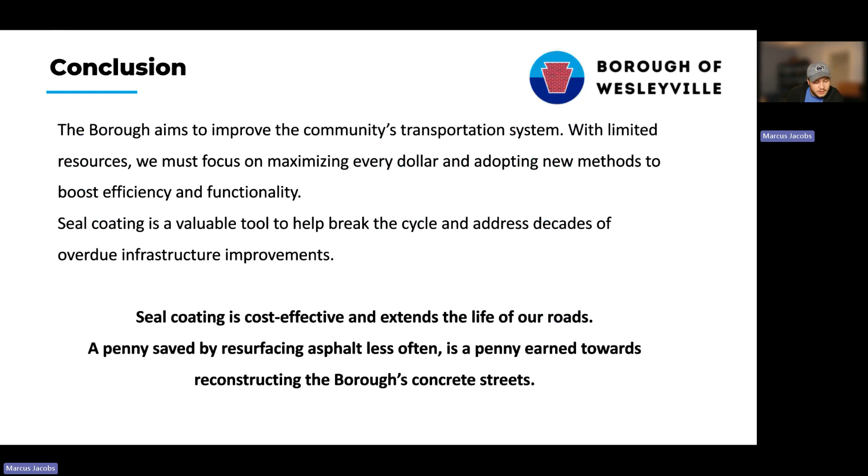Seal coating is an invaluable tool to help break the cycle and address decades of overdue infrastructure improvements. It's cost-effective and extends the life of our roads. A penny saved by resurfacing asphalt less often is a penny earned towards reconstructing the borough's concrete streets. That's how you have to look at it. A penny saved is a penny earned.

Now, overall, today we went over an overview of our transportation system. We talked about the 2024 construction season, our concrete streets and the challenges we face there, and some of the critical pavement preservation techniques we have available. And then what is our plan for the road ahead.